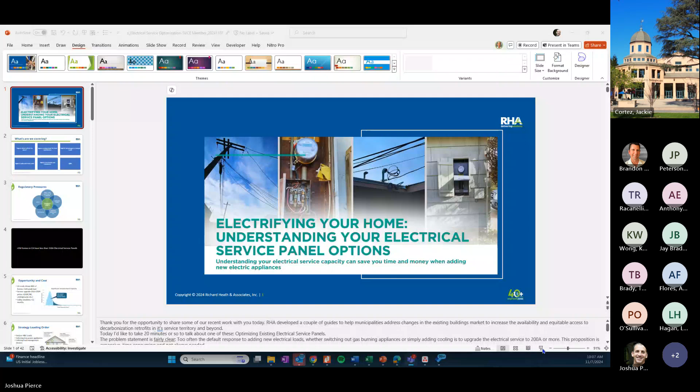Josh, are you back? Can you hear me now? We got you. All right, great. Yeah, my little HD web camera that has the microphone just had to reset. All good. Okay, great. Well, I'm going to pass the mic to you, and we'll go from there. All right. Get this show on the road here. Share my screen. Can everybody see the front slide?

Yeah. Great. Okay. Well, thanks again for the opportunity to share some of our recent work with you today. Sponsored by Silicon Valley Clean Energy, RHA developed a couple of different guides to help municipalities, contractors, and homeowners address changes in the existing buildings market to increase the availability and equitable access to decarbonization retrofits. So we'll take about 20 minutes today to talk about optimizing existing electrical service panels from a strategy perspective, and then Brandon is going to dive in and actually show a few case studies.

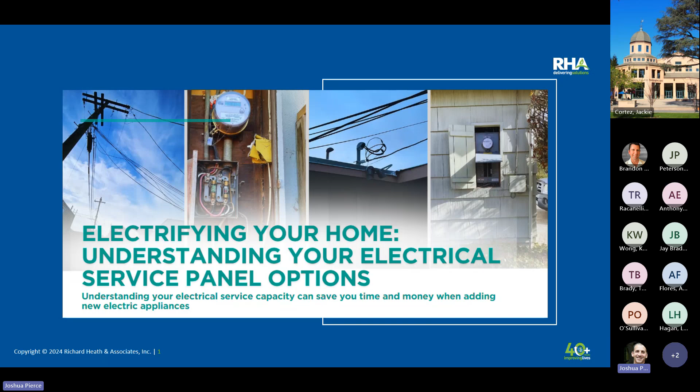And we will try and focus in this presentation on the issues from the perspective of local jurisdictions. Some of the information we're presenting here may be review to you. We'd also love to hear your experiences and maybe even learn some new information and new insights from all of you as well, since you're out there doing the work every day.

So we will be addressing this topic of optimizing electrical service panels in existing buildings, specifically when adding new electrical loads. So we'll kind of start with, what's all the fuss about. We'll talk a little bit about strategies for optimizing your peak electrical loads in buildings as you're doing your electrification design, or just adding any new loads.

We'll talk about some technologies that we've used in other programs to help manage loads intelligently, which is also a strategy for reducing peak electrical demand in a building. And then, like I said, we'll jump into the codes, talk briefly about the different code sections addressing electrical calculations, and then show how we used different California Electrical Code approved methods in some of our case studies and what the results of that were.

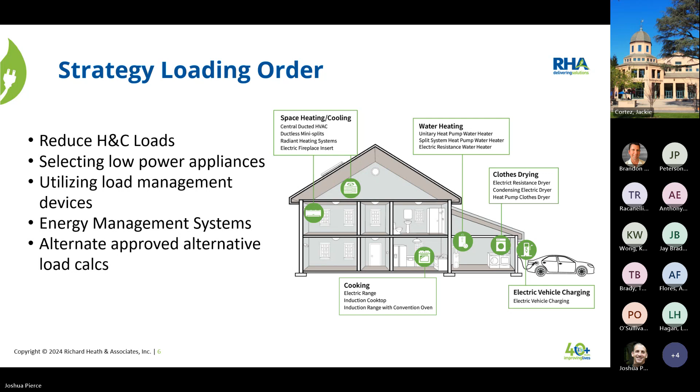Okay, any questions before I keep moving on? I'll just pause for a second. Okay, well, I'm not hearing or seeing anything in the chat either, Josh. I think we're good. Yeah, it's all good.

So yeah, as you folks probably know, because you're seeing a lot more of them come through, heat pump water heaters are certainly having a moment. And while they're not without some limitations, they're certainly gaining in popularity, reliability, and flexibility, meaning there are more products available on the market. Notably, 120 volt, or what they're calling plug-in heat pump water heaters, have a much smaller inrush current than your traditional 240 volt unit with a larger compressor, and consume between 600 and 1,000 watts when operating. So significantly lower peak power draw as well as ongoing draw.

They do have longer recovery times, so we always recommend that you significantly upsize the capacity of the tank whenever installing 120 volt. And we don't recommend them necessarily for every home, mostly for smaller homes or homes with fewer total fixtures. But it is a really effective tool. Another one is variable speed, even two-stage.

Hey, Josh, can I just add something to make sure people understand it? Please. The main difference between the 120 volt units and the 240 volt water heaters is that there isn't, in the 120 volt units, a resistance heater backup for when you need fast recovery. The 240 volt units normally do have a hybrid mode. The 120 volt units are pure heat pumps. Yeah, thank you for that clarification. I leave mine in heat pump only mode anyway, so it would make no difference to me.

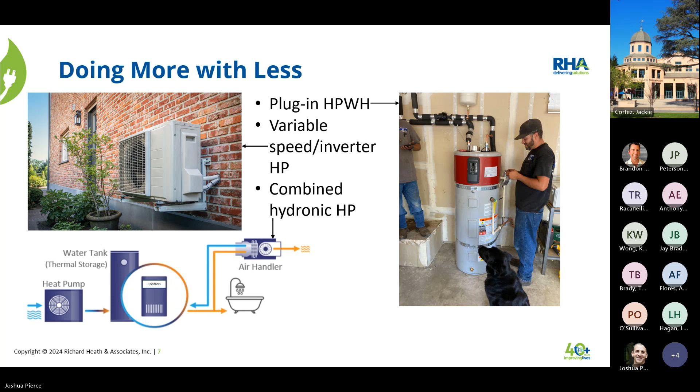Okay, a few other examples would include induction cooktops, more efficient, safer, and very reliable compared to electric cooktops, and certainly safer than gas as well. They have lower peak demand than your traditional resistance cooktops, certainly gaining a lot of popularity. Some folks are resistant to them. We have had folks who haven't wanted to install them in our programs. However, we've never had somebody ask us to take one out because they were unhappy with it. So there's a little bit of an adjustment period there.

I loved my gas range, but I recently switched to induction, and once I got used to the slightly different cooking, yeah, I'll never go back. It's so easy to clean, and I can boil water in 2 minutes.

They're pretty cool. We're also seeing a lot of innovations around heat pump clothes dryers, and even clothes washing and drying in one system. These also have significantly lower peak demand than traditional units. They're more energy efficient as well, so they use less kilowatt hours. The one drawback is that they tend to have slightly longer drying times, but the technology here has improved dramatically, especially in the last 5 years.

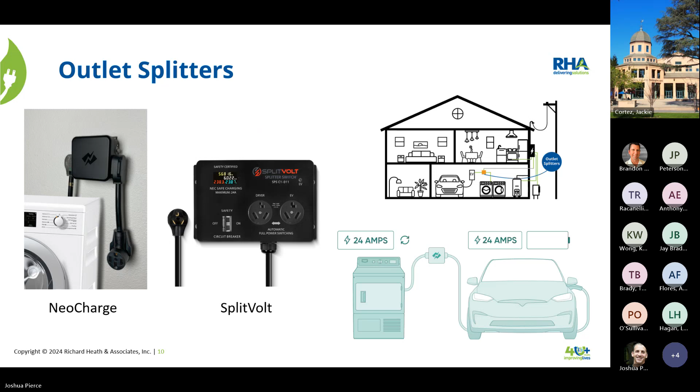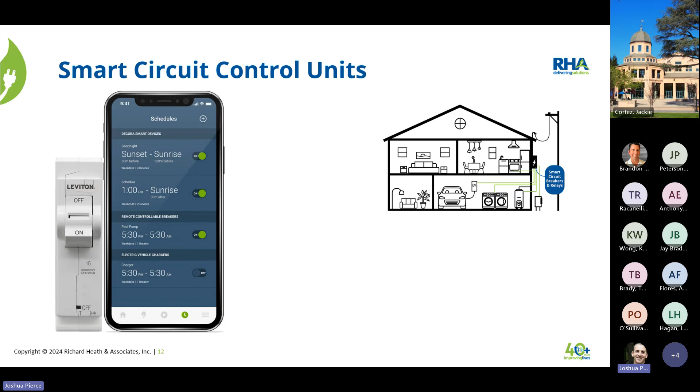Individual smart circuit control units like a simple switch. There's certainly others. Just one example. We're not promoting any particular product here, just providing examples. This operates similarly. They can also have CT units so that you can do a little bit more refined monitoring if you want to. But it in effect acts the same way, just a slightly different configuration. Same thing with a smart circuit control unit. Again, it provides you with the ability to manage two loads on a single dedicated circuit.

And then finally, at the top of the technology stack here, we're seeing more and more people selecting smart electrical panels. Many of them have load management capabilities. To the best of our knowledge right now, SPAN is the only one that actually meets the requirements for an energy management system calculated under Article 750 of the National Electric Code, which is, I think, going to be adopted in 2026 in the new electrical code. But if any of our code experts out there want to correct me, I could be wrong, but that's what I've heard.

And this is really interesting. So I'll take just a minute to talk about our experience anyway with smart panels and using them for load management. And I think Brandon maybe even has an example from one of our projects. So this can be a really effective strategy where you've done everything you can, but your home just has over 100 amps. Let's say you have an existing 100 amp panel and your total load is going to be somewhat higher than that in your calculations.

By using an energy management system that can specifically address the issue when the rare occurrence happens where you're going over 80% of the panel's capacity, it strategically shuts down individual devices or individual circuits until that moment, typically something that lasts from a few seconds to a few minutes, passes and the load drops back down. So that's just one example of other strategies that can be used with these smart panels.

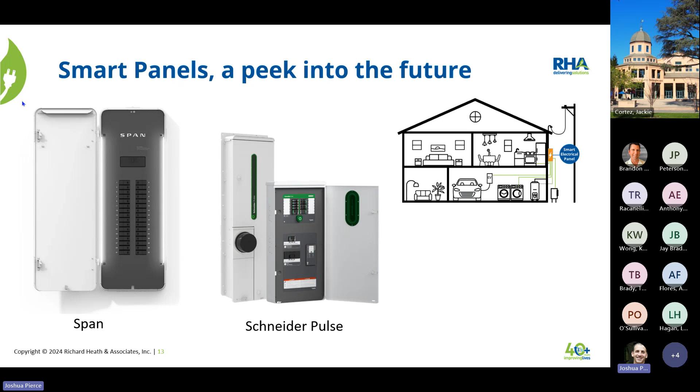Okay, well that's it for my technology talk. I'll just introduce our next section here and then hand it over to Brandon. This next section we're going to be chatting about the electrical code, something you folks are super familiar with. So again, forgive us if some of this is review, but we want to talk about it through the perspective of having run these programs. So some examples of where we've used load calculation methodologies in the California electrical code in lieu of the most common one, which is, as you all probably well know, 220.82, and had some different impacts.

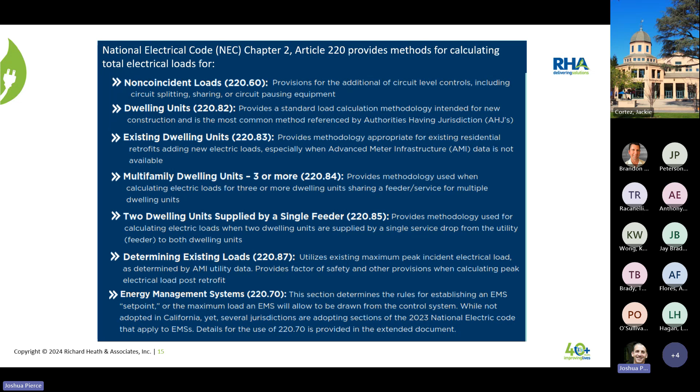So we'll briefly talk about 220.82 versus 220.87 versus 220.83, and maybe talk a little bit about energy management systems and the National Electric Code. And then we'll jump right into the examples. So without further ado, I will stop sharing my screen.

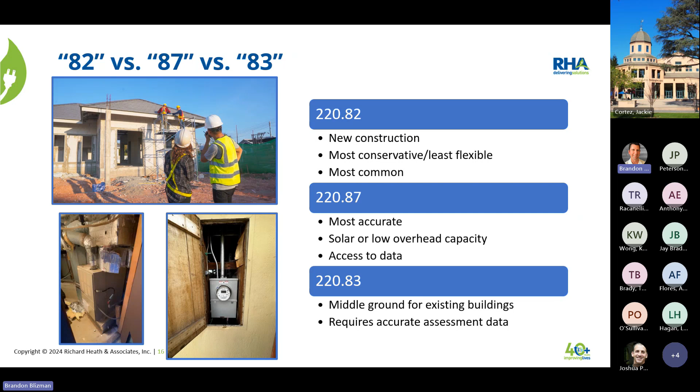So we're going to take this next few minutes to take a look at some use cases when these three most common load calculation methods are best used. 220.82. This is the default and really the only method for new construction.

Just a second. Sorry, my Roomba decided to start right now. It was running behind me. Hopefully you guys didn't hear that.

For master meter units and multifamily buildings, we typically rely on 220.84. 220.82 is a little bit more conservative in that it calculates 100% of the load, whereas 220.83 uses 80% of the load. And this can sometimes make the difference between being able to use the same panel or at least not upgrading the service feeder capacity.

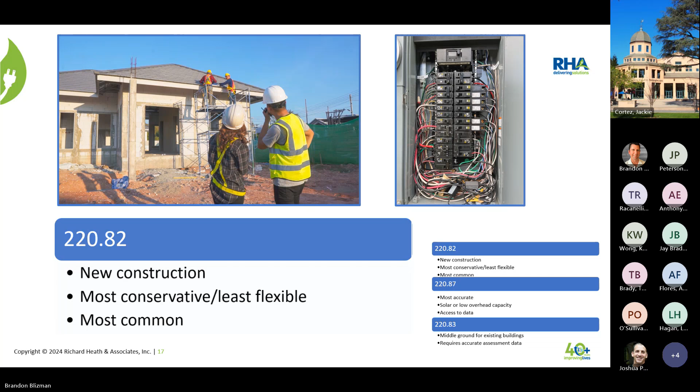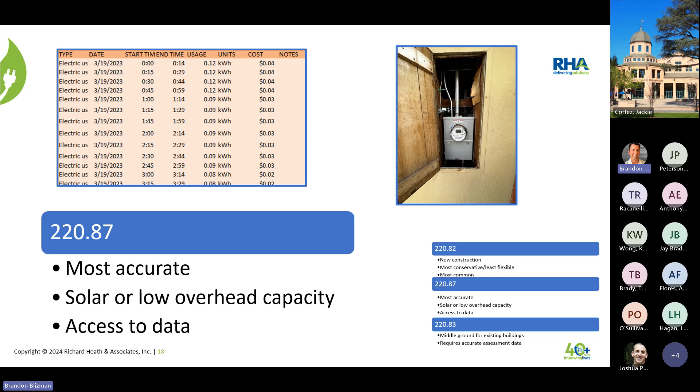Next, 220.87. This is the one that uses AMI data, and it can be a very effective and accurate way to establish the remaining capacity. But there are a few drawbacks. We just want to highlight that there are some situations where this is impractical or just impossible. Things like low overhead capacity, the presence of solar. If you have solar, you're not allowed to use 220.87. There's also an interesting challenge around getting access to AMI data. A year's worth is what is typically required.

And finally, 220.83. In our humble opinion, it's best to use 83 or 87, maybe a conjunction of those two, unless, of course, you're using an energy management system. The other thing that I think is kind of cool, because I'm going to nerd out here for a little bit, is if you have access to a template or a calculator, the process is pretty quick. So what we suggest doing is comparing 83 and 87. This provides us with two perspectives, and it can be helpful to discern what happens when we're very close to the maximal allowable load.

Hey, Brandon. Yes, sir. I wanted to pause for just a second. I think we have enough time. I wanted to pause since we've got folks from a variety of jurisdictions here. I'm curious, do you typically provide some sort of a template to your contractors to do load calculations, unless they have them themselves? And when you do, what is that template based off of? Is it still typically based off of 220.82, or do you have different ones for the different methods? Love to hear from folks. You can either just come off mute or comment in the chat.

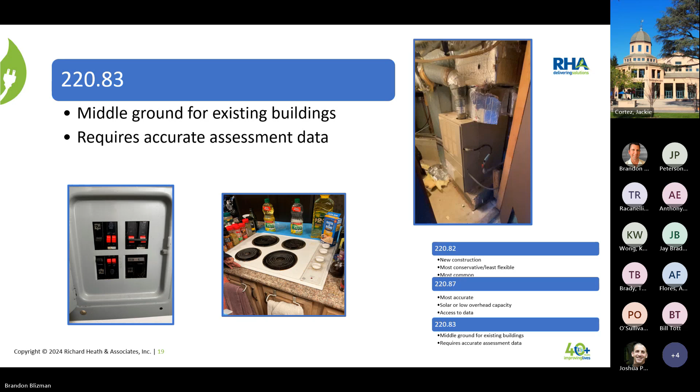All right, hearing none, I'll move on to discussing the energy management system, NEC Article 750.30. This is what allows you to use energy management systems in buildings. Specifically, it defines the requirements for monitoring and controlling electric loads, making sure there's no overloading of the circuits or feeders at any time. It also connects with NEC 220.70, which defines the requirements for establishing a set point for the maximum continuous load.

As Joshua was talking about, these things are pretty cool. You set a max load, and it reduces the available current to the circuits, like a dryer or an EV charger. In our experience, some jurisdictions have already adopted the language to make this streamlined for contractors and folks wishing to install these, and some jurisdictions just straight out forbid it. Have you guys had any experience with these energy management systems? Just curious.

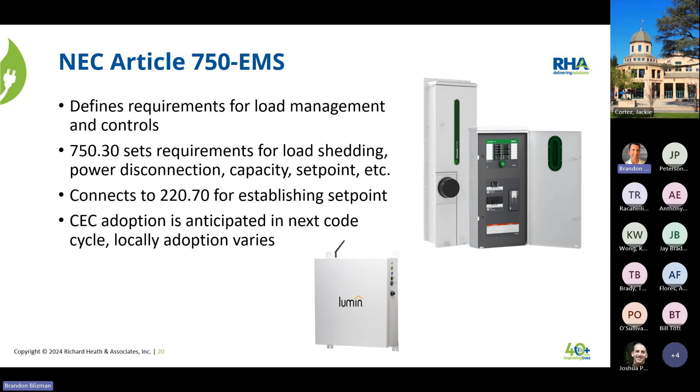Kind of a shy crowd. That's okay. We'll keep moving. Well, that might just reflect that they're not commonly seen. Oh, look at that. Tony says lots of SPAN. Tony, thank you. That's great. Thank you for confirming that. That's something that we have seen. They're up and coming, I guess is a good way to describe that, which is why we're having this conversation here. Thank you, Tony.

On to 220.60. This is a unique way to use what we call the largest load, right? As we'll demonstrate in a minute, when we start talking about the use cases for circuit sharing or circuit pausing devices, the language right out of the code says where it's unlikely that two or more non-coincident loads will be used simultaneously, it shall be permissible to use only the largest load that will be used at one time for calculating the load on a service. In other words, you connect two appliances, the device only uses the largest load for the calculations.

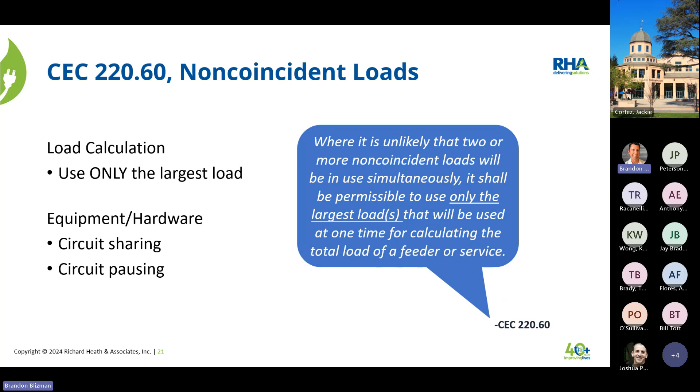All right, this is where a lot of the rubber meets the road for us. I apologize for nerding out here. I get excited about this stuff. If I start talking too fast, just raise your hand, tell me to slow down. But I'm going to go into some of the use cases and some case studies here. Words are cheap, so we're just going to dive in. We'll also get into the calculations and share the results and how we arrived at being able to fully electrify these homes.

Here's the Davis residence in the Bay Area. A retired couple successfully upgraded all of their gas appliances to all electric on a 100-amp panel, avoiding the need to upsize their electrical service and spend possibly thousands, as Josh alluded to, for undergrounding their service.

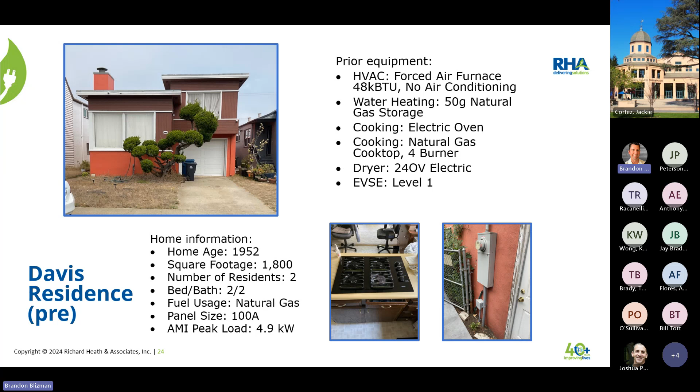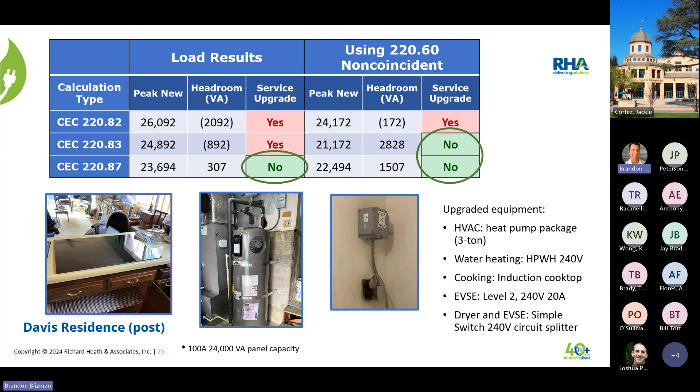Now, taking that same equipment and adding a circuit splitter to the dryer and the EV circuit, both 220.83 and 220.87 pass, right? That allows us to potentially use either of those load calculation methodologies and a circuit splitter, avoiding the need to do the service upgrade. It should also be understood that in order to achieve peak demand in a house, every single appliance, light, plug load has to be running at the same time, which is rare unless there's a teenager in your house.

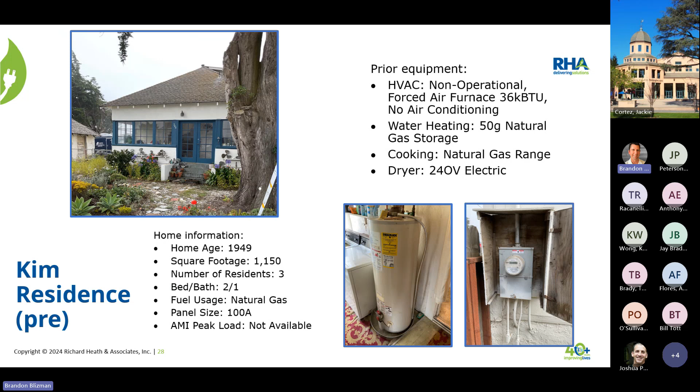Let's take a look at a couple more homes here. Here's the Kim's Bay Area residence. A family of 3 upgraded from gas to electric on the 100 amp panel. Here's a list of all the equipment and some information about this home. On this home, we were having challenges getting access to their meter data. Even if we had the meter data, it might have been a little bit close. To get there, we employed a smart panel.

Another thing to point out here is that smart panels are not for everyone. They do require additional customer education. While this customer was faced with the cost of upgrading underground service and a 2-year delay, they opted for the smart panel.

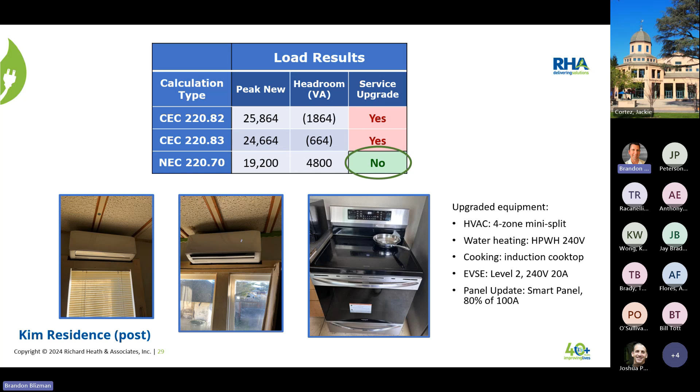As indicated here in the table, just like the Davis residence, both 83 and 87 allowed for upgraded appliances without having to upgrade the service. Since they already had some electric appliances, it's also interesting to note that their peak load was about twice that of the Davis residence, leaving less room for new loads. Where we gained an advantage there was switching the electric baseboard heating to a central system, and we got some of that headroom back, as well as saving a ton of money on their utility bills.

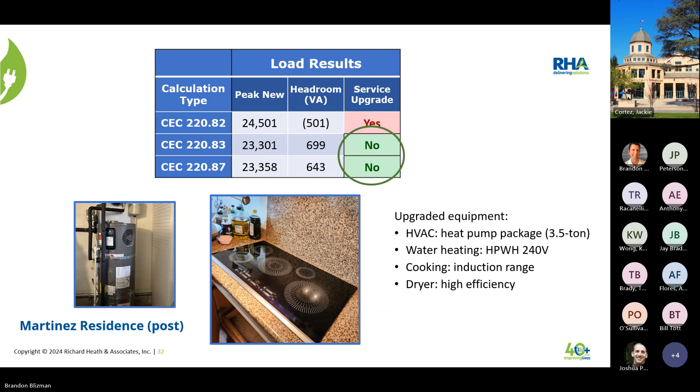With that, I'd like to take a pause and open the floor to any questions. Feel free to take yourselves off mute, use the chat feature. I'm curious to hear from folks, how much of this is review for you? We'd love to get your feedback. Was there new information that was introduced that was useful to you? Or was there something that you'd like to see us go into more depth, or maybe even spend more time explaining? Love to get your feedback on how useful this presentation was.